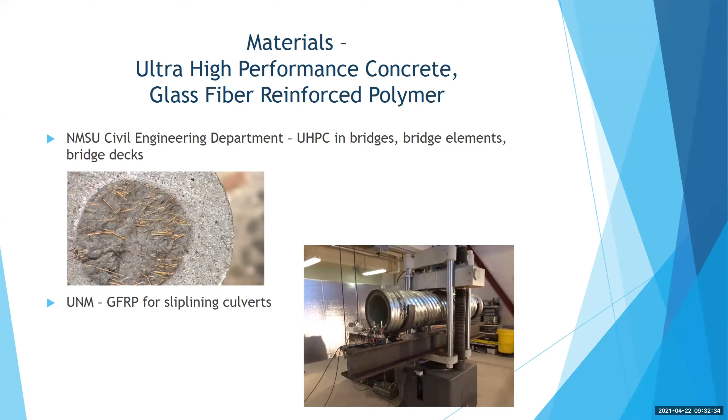Self-driving trucks are on New Mexico's highways today. Two companies, Embark and Daimler, are testing autonomous trucks on I-10 and I-40. They still have drivers in the trucks as backups. Embark is testing platooned trucks using vehicle-to-vehicle technologies. Last month, the legislature passed House Bill 270, which will allow NMDOT to promulgate rules to expand autonomous vehicle testing in the state.

Over the next decade, New Mexico will see tremendous growth in the number of electric vehicles on the road, and the supercharger infrastructure to support electric vehicles statewide.

Flying cars — this is one of my favorites. A few weeks ago, an Albuquerque-based company announced that it is partnering with a Dutch company to build a car that can become a gyroplane.

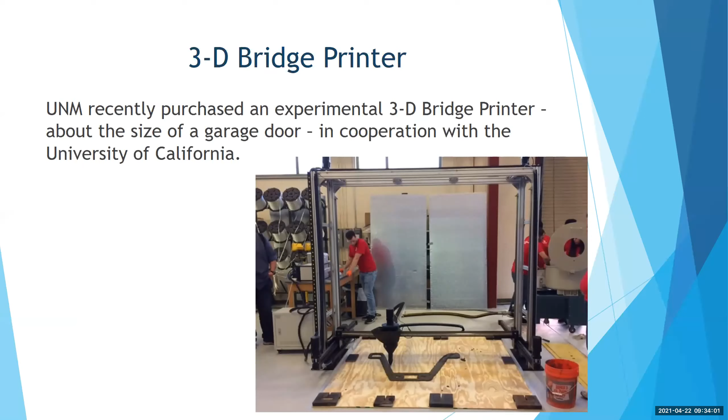UNM recently purchased an experimental 3D bridge printer, about the size of a garage door, in cooperation with the University of California. They're using the device to test materials and processes that could be used to print bridge elements or even print entire bridges in the future.

NMSU's Physical Science Laboratory is one of the seven Federal Aviation Administration approved and funded unmanned aircraft systems test sites nationally.

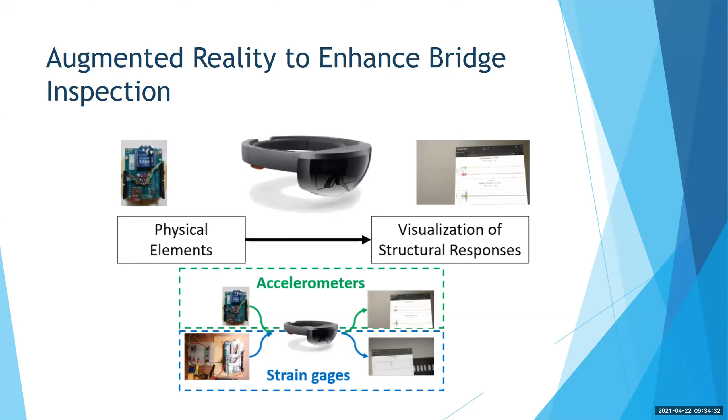UNM and Tran-SET, a regional university transportation research center, are collaborating to test use of augmented reality goggles to enhance bridge inspection.

NMDOT has installed innovative dust storm detection systems on I-10 at the Lordsburg Playa. They trigger variable speed limits and electronic message boards. NMDOT has also installed a cutting-edge thermal detection system that identifies wildlife along US 550 near Cuba. This illuminates a warning sign to motorists when elk, deer, and other large animals are approaching the highway.

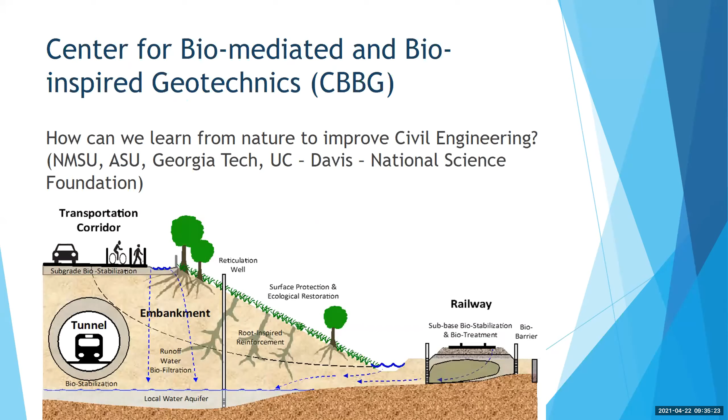NMSU is part of a consortium funded by the National Science Foundation to study how we can learn from nature to improve our civil engineering technologies.

So, as the guy from the Research Bureau at NMDOT, I hope this brief PowerPoint has stimulated your creative juices. Over the next several months, as you attend webinars, read articles, or just as you're at your work sites, please take a moment to think about whether you can identify a good idea that might make a good research project.

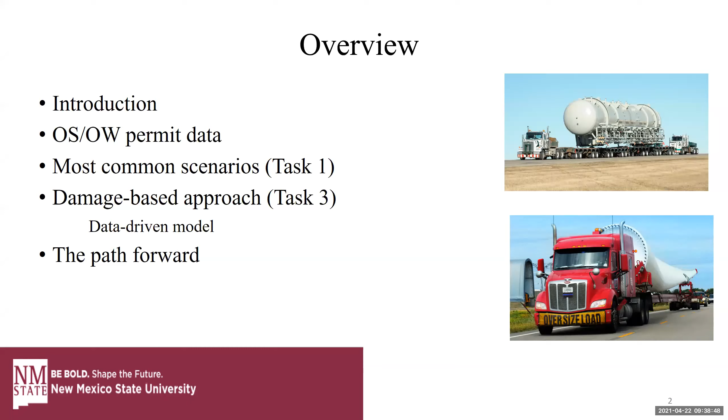So I will talk a little bit about the state of the problem, where we are, and what was the motivation of doing this research. Then a little bit about the oversized and overweight permit data we have from ProMiles and the most common trucks going through our state. Finally, I'm going to talk about a more advanced approach to evaluate damage based on a data-driven approach we're developing here at NMSU to evaluate the damage of oversized, overweight vehicles to our infrastructure. And finally, I'll talk a little bit about the path forward.

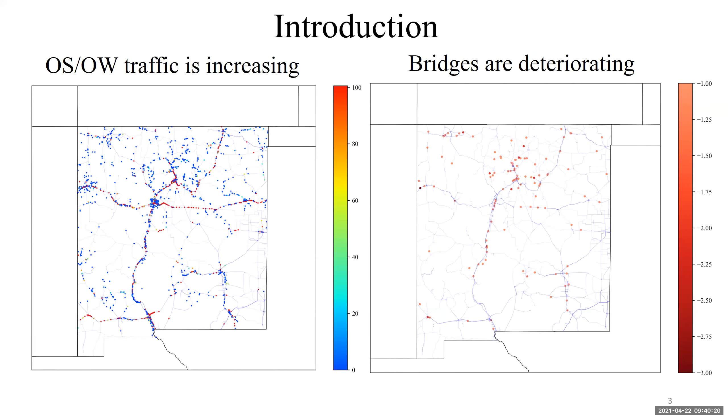So now the question is, what is the relationship between the left side and right side? You can see that we have a huge amount of data, and we want to really take the data-driven approach. But let me go back a little and talk about phase 1.

What really motivated us to perform these tests is the question of how we can maintain our bridges and allocate money to them. Are we charging enough permit fee for those vehicles crossing our state, and where are we in terms of that when we compare with other states?

So in the second phase, in the first part, we decided to have a better comparison -- a more meaningful comparison -- basically having the most common scenarios of oversized and overweight vehicles, and then going back to those states again to get a quote in the second task and compare the value. This way we have a better comparison.

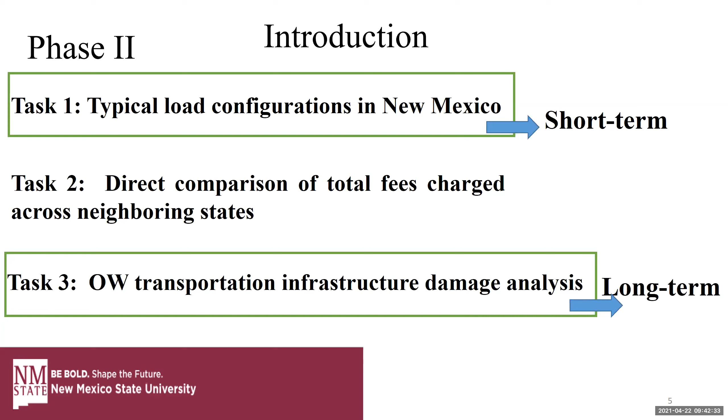Here I'm going to talk mainly about the first task and then the third task, which was more data-driven. In the first task, I'll explain how we used the data to come up with scenarios that we can compare apple to apple. Then in the third task, which is more advanced, I'll explain our approach to make a better quantification, evaluation, or estimation of the damage or cost to our infrastructure.

Initially we had 3 years of data from ProMiles. ProMiles is a company operating in many different states, and when you want to get a permit for oversized overweight, this is the company that handles it for New Mexico state. So they have a lot of different data, and in particular there are two types of data we're very interested in.

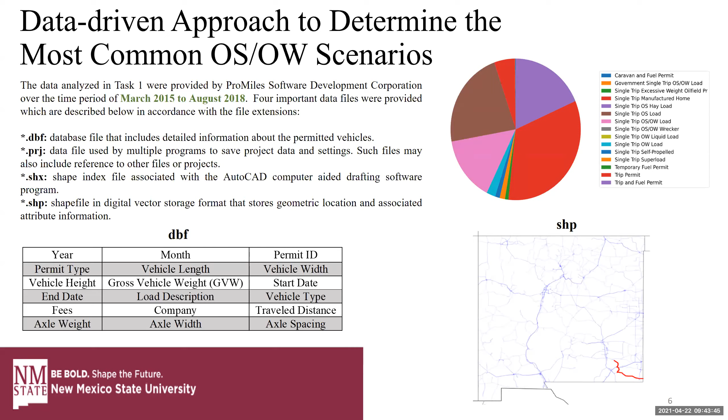And we can then go to other states and get a quote in the second task to compare the value. You can see here one example - it's just like an oversized, overweight vehicle example.

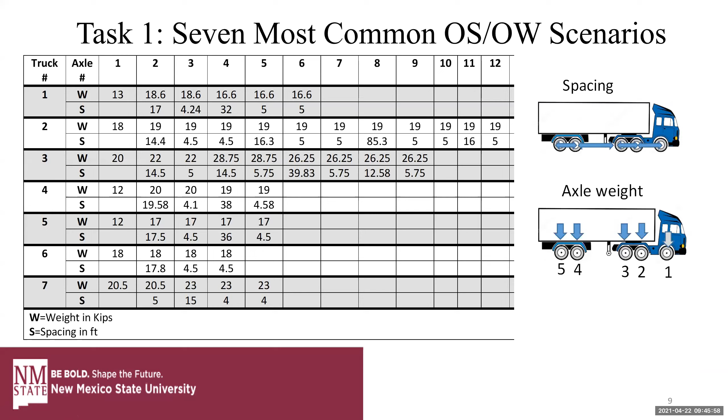Which is one of the most common and very important ones. Superload, because they are very heavy. Oversized-overweight is another type that is pretty much heavy and frequent.

Oversized is very frequent but not very heavy. Self-propelled is not very frequent, not very heavy, but they are very condensed. They may have a huge impact on our infrastructures.

And you can see the comparison, qualitative comparison of that in task 1 for the gross vehicle weight, which is the intensity of that load, and the frequency, basically.

So after task 2 is done, we performed a simple type comparison. We went to other states, we got a quote, we compared the value, and we realized that the conclusion of phase 1 was valid, and we are among those that charge the minimum amount of the permit fee.

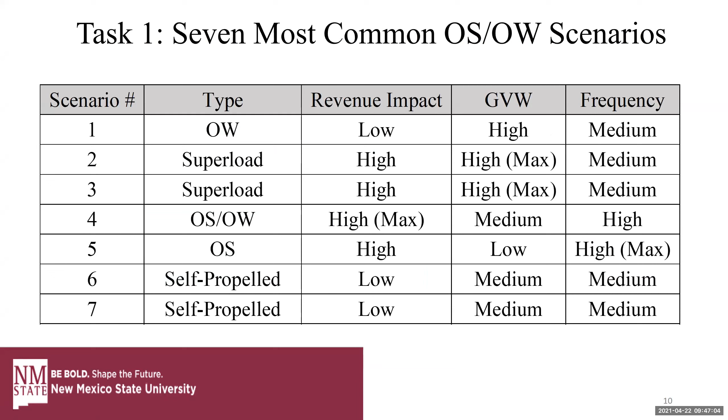So in the third task, the question is how much, or on what basis, we have to charge more. Are we going to do what other states charge and do the same, or are we going to have a more scientific way of evaluating damage and the cost of the damage, and then at the end calculate the amount that they cost us.

Basically charging them that value based on the scientific facts. So for that reason, you can see this chart here - the load information is coming from the permit data, bridge information is coming from the national bridge inventory data. I'm going to ignore environmental impact, like temperature contrast, and elaborate on that a little bit.

So in this phase, we are not going to consider environmental impact, which is a very important aspect and causes damage to our infrastructure as well. And then there are two main methods that are very common.

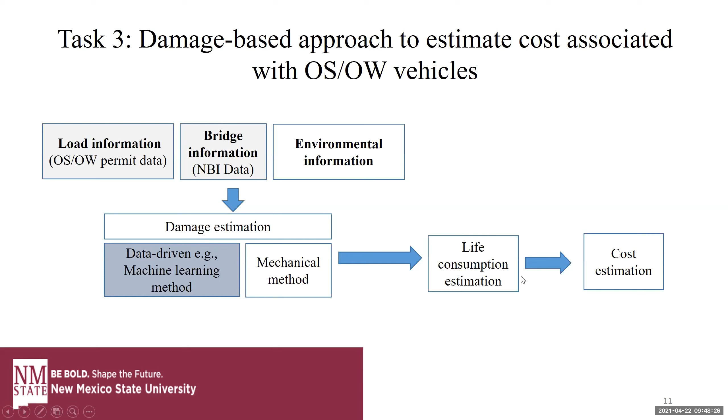One is the data-driven method, the other is a mechanical method. We are going to take the data-driven approach. In the next slides, I'm going to talk about those highlighted ones. But the final goal is after we evaluate the damage, we calculate the life consumption of the bridge and then calculate the cost. But these two steps are not part of this phase.

So on the bridge side, this is a chart from AASHTO. On the left side, you see the impact of load on the deterioration, or the drop in the life of the bridge structures, okay?

So there are two particular important pieces of information I want to highlight here. When you have a moving load, one important factor is the load intensity, the other is the load frequency. Both of them are very important factors that we are going to extract from the permit data.

On the right side, you have bridge parameters from the NBI data, which is age, maintenance time, material, geometry, average daily traffic, all of those. And then we have bridge condition.

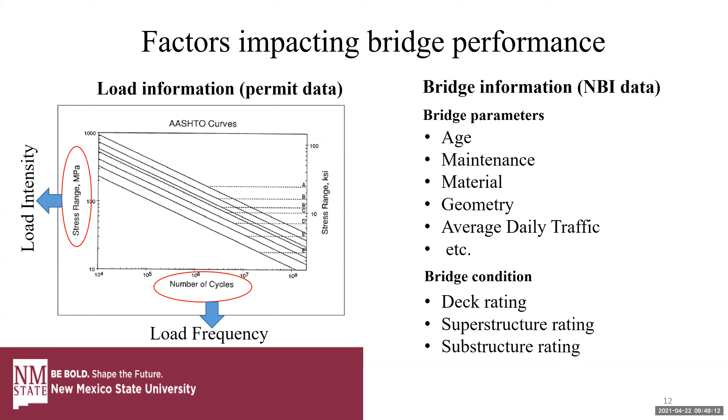So what we are going to do is create this data-driven approach. On the left side, we have the load intensity and frequency calculated based on the permit data. And we have all the bridge parameters available from the NBI bridge inventory data. On the right side, we have deck rating, superstructure rating, and substructure rating, which is somehow an evaluation of the condition of a bridge. And we want to find the correlation between the left side and the right side.

In general, bridge ratings are done on a scale between 0 to 9. 0 is the worst and 9 is the best. So you can see here the distribution of the deck ratings, substructure rating, and superstructure rating. A red dot means something is wrong. For example, here we can see a red dot close to a rating of 1. And there are different levels of structure: substructure, superstructure, and deck.

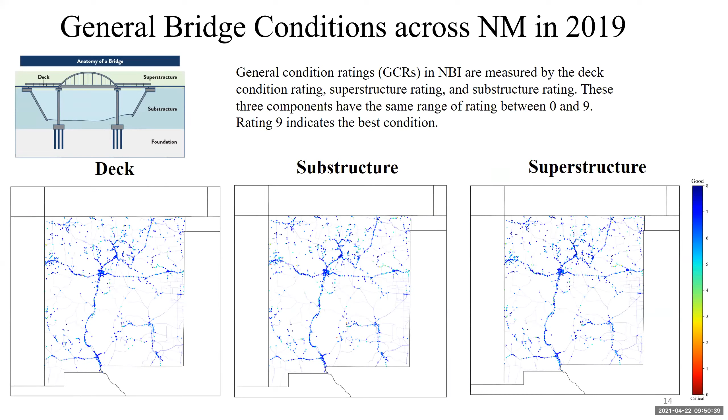But it's kind of hard to see the changes here. Based on AASHTO, we have 3 different groups. Between 0 and 4 they call that poor, between 5 and maybe 6 or 7 they call that fair, and then we have the good category. Here it's a little bit better, you can see the clusters, but still it is not very representative.

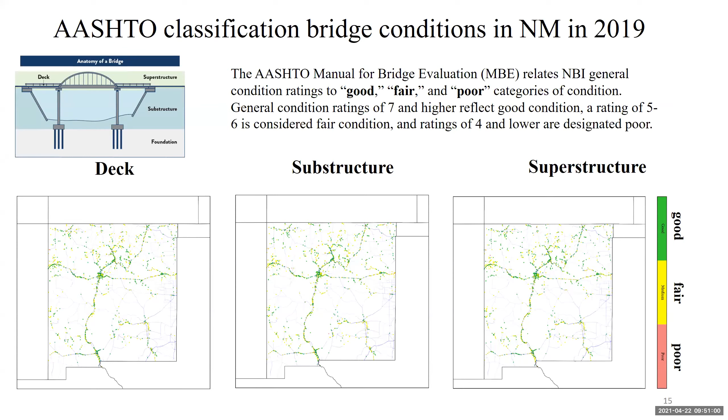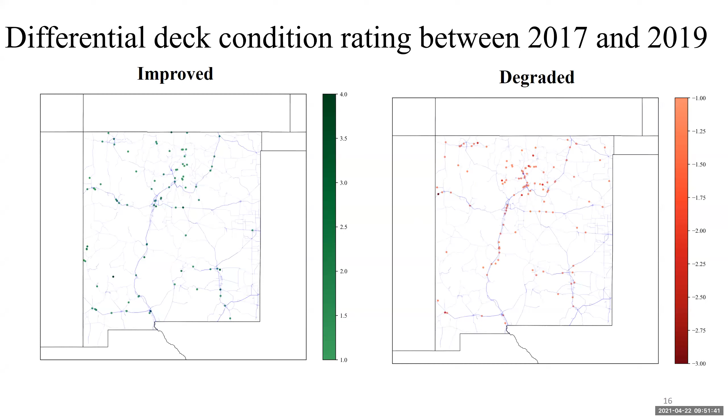But later you will see some of those about the load. In this way, we can really represent and show the clusters of the areas that are getting impacted by the infrastructure with the load. This is for superstructure, and then we have one for substructure.

Now for the load, block diagram number 2, we are going to have those two values I mentioned, very important: load frequency, load intensity. For the first time, we introduced average daily oversize overweight permit traffic, which we call ADPT. I'm going to show you some results of how we calculate this per bridge for the entire New Mexico state using the available data we have.

And the load intensity, basically we calculated that based on the average gross vehicle weight of trucks crossing one bridge. So for example, let's say in one year we have 200 or 30,000 oversized vehicles going over a bridge - the average gross vehicle weight of that in that year, how much is that value? That's the load intensity for us.

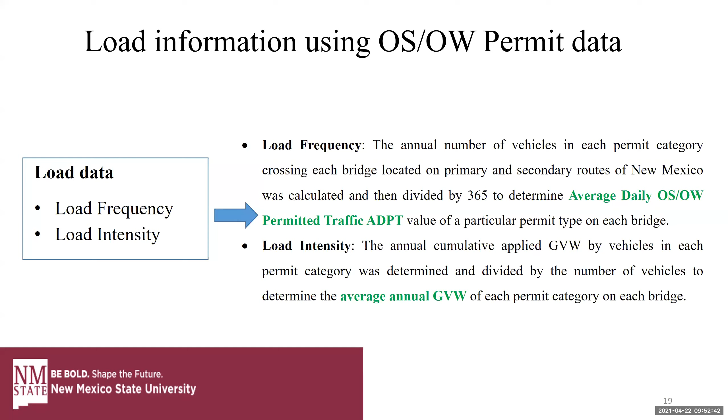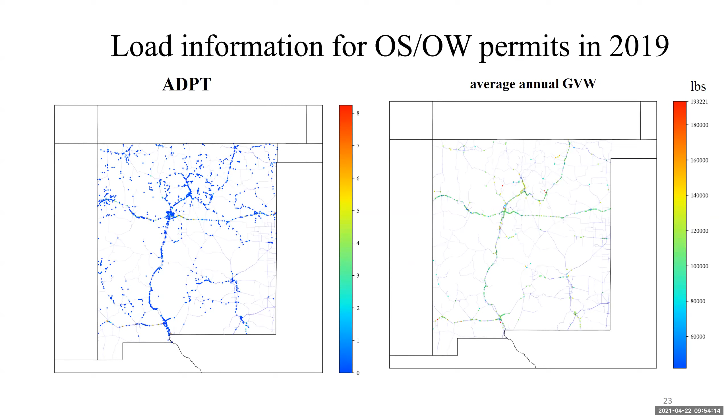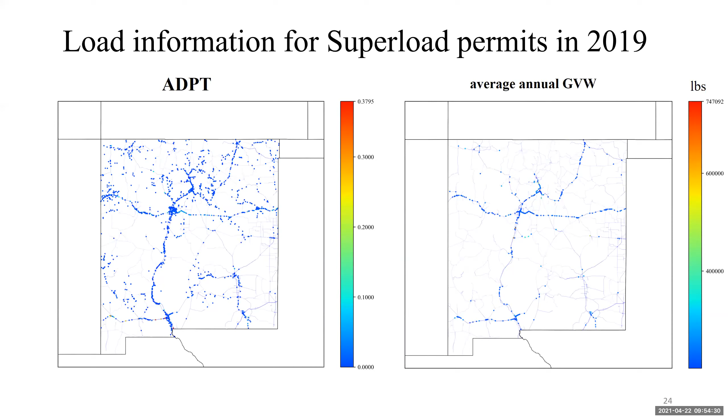So overall, you can see for self-propelled the same. Now, basically, I have the data on the right side, which is the bridge conditions. This is the differential value that I showed you. On the left side, I showed you how we calculated load intensity and load frequency.

Now, in the next step, we are going to use feature extraction or some algorithm to pick the most common, most influential features in the bridge data inventory, and then create in the 4th step the data-driven prediction model that we can feed in anytime and predict the ratings on the right side. But this is more of the path forward, what we really want to do. The last slide is the end of basically phase 2.

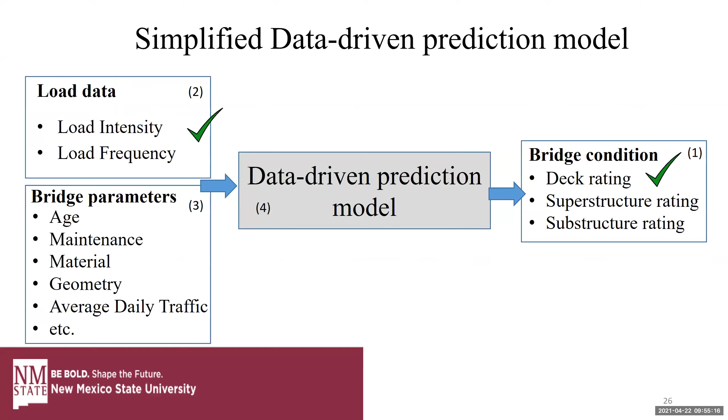But really, what we want to do is consider more data on the load. The better data and the more accurate or larger data you have, the better decision making you can do. So we want to expand that in the future.

And then we want to have a more advanced data-driven algorithm to predict the life consumption and the cost estimation, and at the same time have a feedback loop here to help more of the data-driven asset management.

Our budget is limited, so which one should we inspect first, which rating is changing, what are the areas where you want to start reconstructing bridges, or based on environmental information, what type of bridge is best for that particular area. These are the questions we want to address in the future.

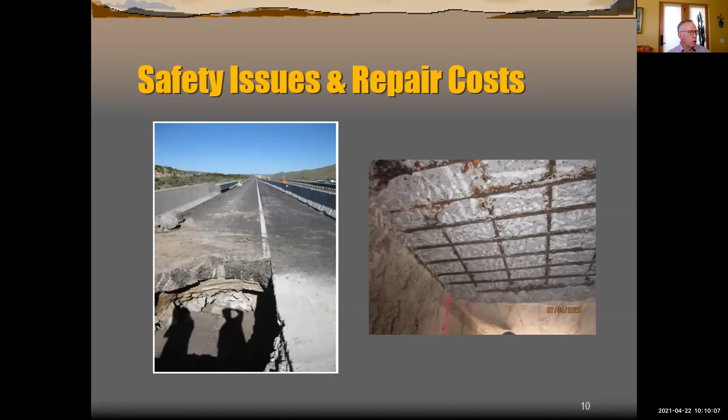So what are we going to do? Well, TAMP requirements, or transportation asset management, the first step is you have to have an asset inventory, and that's essentially what we're starting with. We need to work on objectives, metrics and targets about ultimately how long we want these, or what shape we want these culverts to actually stay in, and that will guide our investment decisions.

There's many other parts of this life cycle planning. I can see a future Research Bureau project trying to identify many of these kinds of efforts for culverts specifically in New Mexico. Ultimately, we wanted to get to the point where we have an investment strategy for how districts could incorporate culvert maintenance and culvert rehab into their long-term plans. Risk management is also an issue.

So the way we're going about this—another shout out to Dr. Hadwiger, because I've been working with him a couple of years, and he encouraged us here at the Bureau to go after a state planning and research grant to do an updated culvert inventory. So we applied for that, and we got an initial award of $500,000, with assurance that we could get 2 additional $500,000 installments over a period of 6 years.

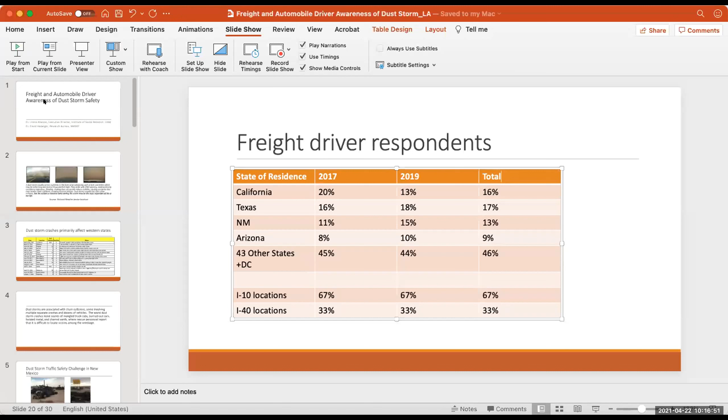Our next presenter is presenting on an evaluation of a dust storm awareness campaign that NMDOT ran over the last few years. I'll throw a little hedge in here - we sometimes get a little competitive with Arizona DOT, who gets all the glory for their dust storm interventions. We've done some really great stuff - we've got revegetation, the sensors I mentioned earlier, and this public awareness campaign. So I like to think we're doing pretty good, and this presentation evaluates our public awareness campaign.

Our next presenter is Dr. Lonna Atkeson. Dr. Atkeson is a professor of political science and a Regents lecturer at UNM. She is director of the Center for the Study of Voting, Elections, and Democracy, and also director of the Institute for Social Research at UNM. She's an internationally recognized expert in election sciences and survey methodology. Her research is supported by the National Science Foundation, the JEHT Foundation, Pew Charitable Trust, and many others. You may have seen her on KOB TV, where she is a political and elections analyst. Dr. Atkeson will be speaking on freight and automobile driver awareness of dust storm safety. I'll pass it to you, Lonna.

Thank you very much. So we're really moving in a different direction, because I'm talking about an assessment of a campaign to inform drivers about safety in regards to dust storms, and what was effective in that campaign, which was sponsored by NMDOT.

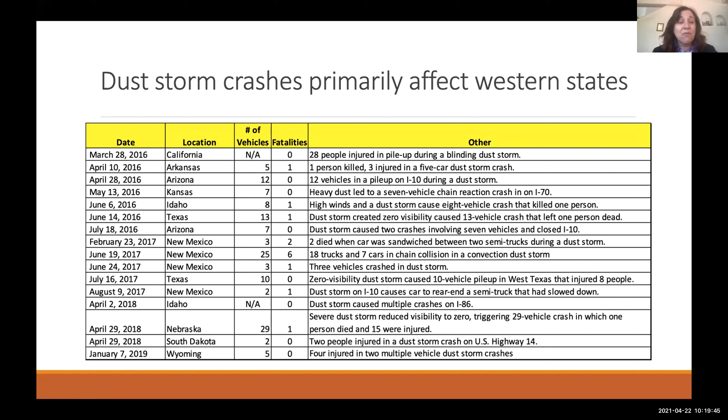Here we can see that, just over the last five years or so, the number of vehicles that have been in traffic accidents is quite large, and of course sometimes there's actually a loss of life. These are preventable if we can provide information to drivers and truck drivers, especially informing them of what actions they can take to ensure their safety.

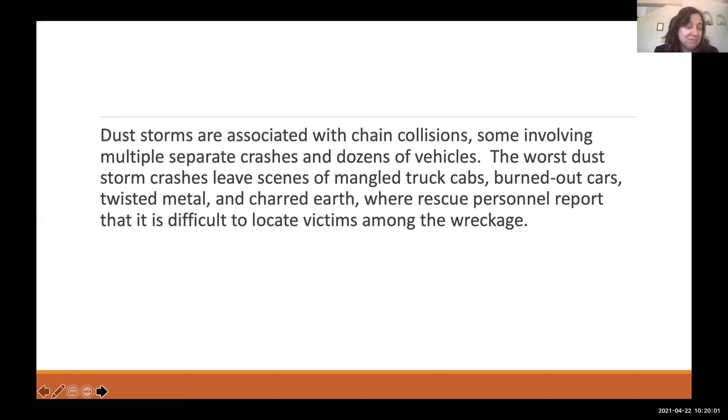Since 2014, we've had 18 fatalities in New Mexico due to dust storms. In New Mexico, we have a plan for what we recommend drivers should do to play it safe in a dust storm: they should pull off the road as soon as possible, especially if they can't exit the highway. That's often not possible because there is no exit nearby—there are long stretches of New Mexico highway where there are no exits or off ramps for miles and miles.

It's really important that people turn off all the vehicle lights, including their emergency flashers. One of the things we found in the study is that this part of the instructions is complicated for people, because in almost every other safety situation, people are told to turn on their lights and include their emergency flashers. So people's historical and lived driving experience tells them otherwise, and this is a real problem for communicating this information.

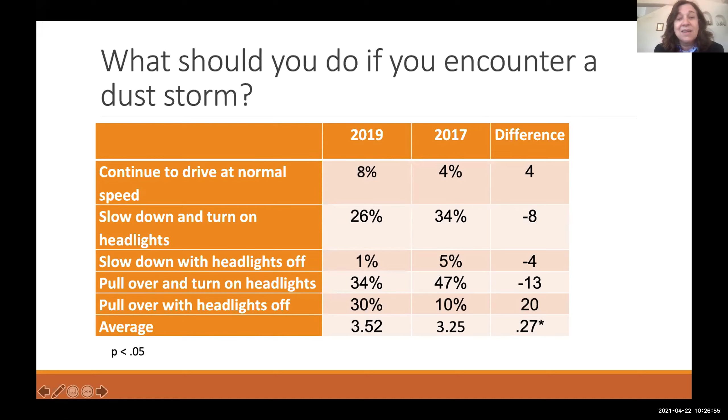What we can see is that between 2017 and 2019, more people did say the correct answer. The correct answer is down here at the bottom: pull over with headlights off. We can see people went from only 10% saying that's what they should do in 2017, to 30% saying that in 2019. So we did see an overall increase in that answer, which we think is very good.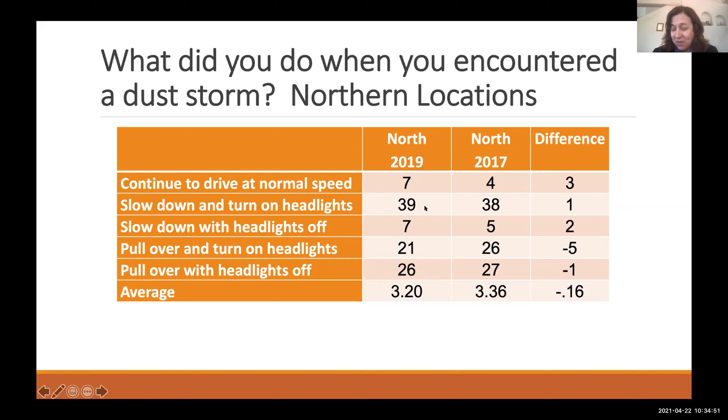What did you do when you encountered a dust storm in northern locations? This is what they actually did as opposed to what they should do. We can see that for truckers, a quarter indicated they did the correct thing, but most of them just slowed down and turned on their headlights. This may have to do with the severity of the storm or something like that. I said a majority, meaning the mode, the plurality there.

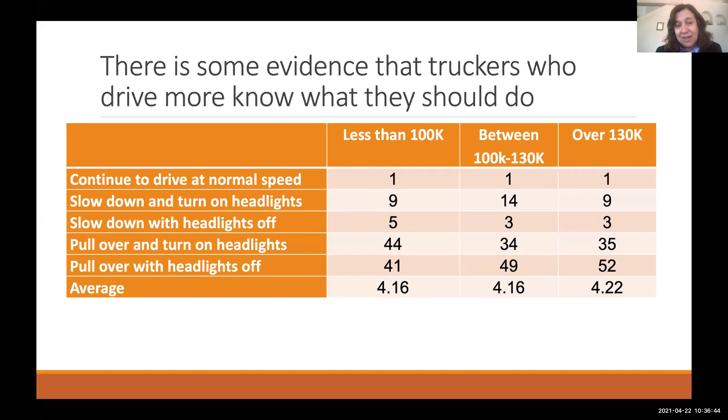There is some evidence that experience matters to truckers, unlike for regular drivers. We do find that drivers who drive more were more likely to pull over with their headlights off. But the important thing is, why do we have this problem between the idea that you should turn your lights off and not touch your brakes, versus keeping your headlights on? What's the problem there?

The real problem is that we would have conversations with truckers, and we'd ask why did you say this? They'd often say, I read the signs, they say this is what I should do, but I don't think I should do that. I have a lot of experience driving, and you want to keep your headlights on, because if you don't, someone's going to crash into your truck, and then they're going to be dead. So I'm not going to do that.

And then we explain to them the problem is the lights, how lights attract people to your car in a dust storm, and how the lights actually make it more likely that someone would crash into you, not less likely. Once we explain the situation, they have a real big aha moment, and they go, oh, I see what's going on here. I now understand this. You can see them feeling much more like, I'll actually do that next time.

There's a lot of research in social psychology that tells us explanations motivate behavior. So just telling someone this is what you should do isn't enough, you need to tell them why they should do that. When we tell people why they should do stuff, research shows they're more likely to do it. So we think there needs to be some way to expand this information drive to include why it is so important to pull over and turn off your lights. That would shift the data again, so that we'd see more people making the correct decision.